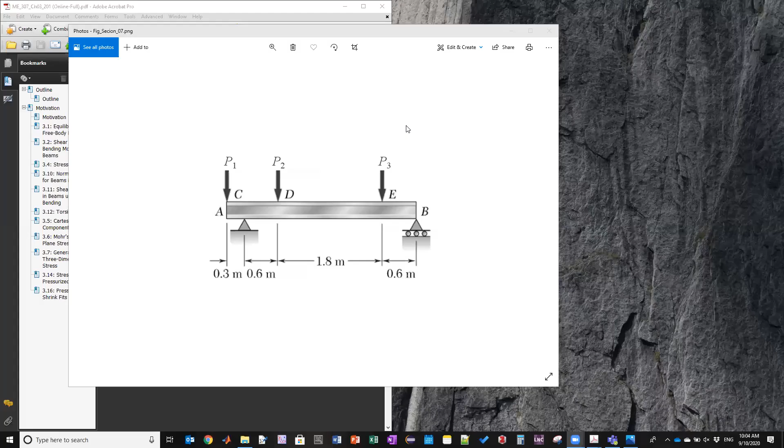Do you see my screen again? Do you see the figure, ya shabab? Yes, this is the figure for the quiz, correct? Yes, okay. All what you need to do, this is Windows. I open the figure, and then I can just go to edit. There is a very short menu here for the most needed things that you usually use, like resize.

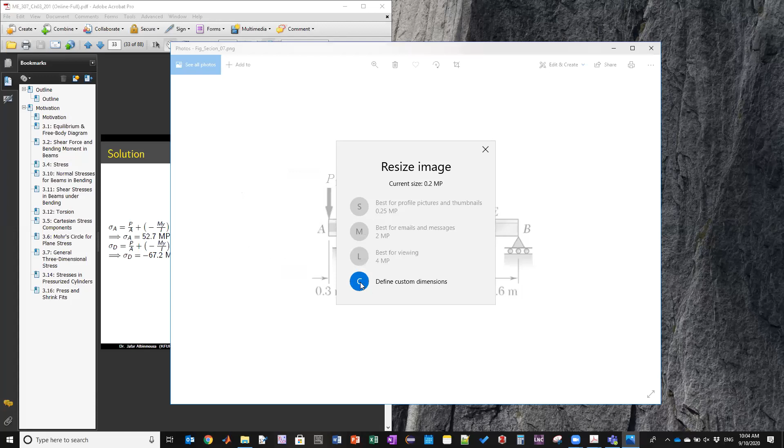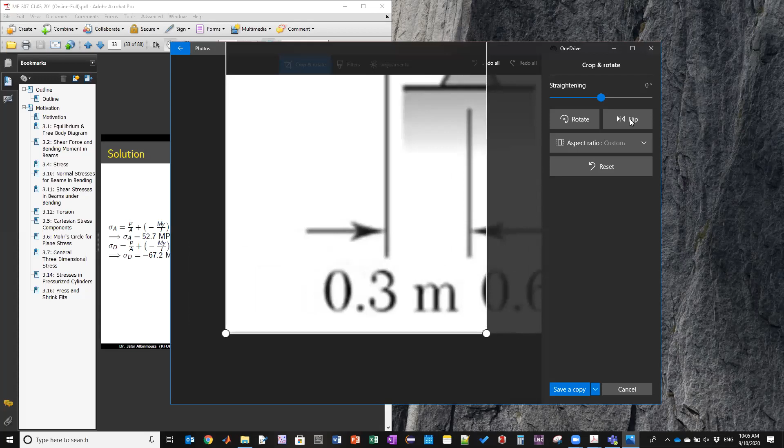When you resize, you can put any definition you want. Play with it a little bit and you will reach the size that is needed. You can crop the image, make it smaller or bigger, whatever. Maybe cut it this way where it shows your face. You can do whatever you want with a simple click. Is that enough? Yes, thank you, Doctor.

I will have to, inshallah, but not today. We are late, we need to move on with the bending section and finish it up. But inshallah, maybe next class, just as a mercy for the grader, I am going to share with you my phone screen live, and show you how I can scan maybe 100 pages in one file, which looks like a scanner. I know some of you did that, but there are too many who didn't, so hopefully I'm going to teach you how to do that next class.

Tamam, all right. Now let's move on to our problem. What are we going to do? We had a discussion on this. I think what I would like you to remember is the following: this vise, which looks like this, or a clamp, is going to have uniform tension because of P as a force.

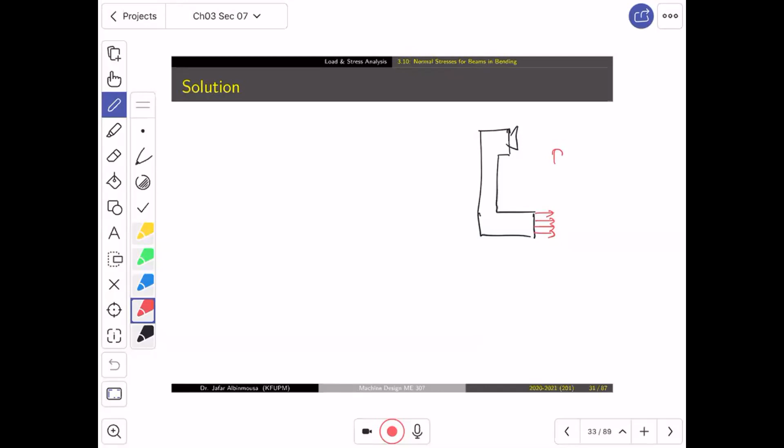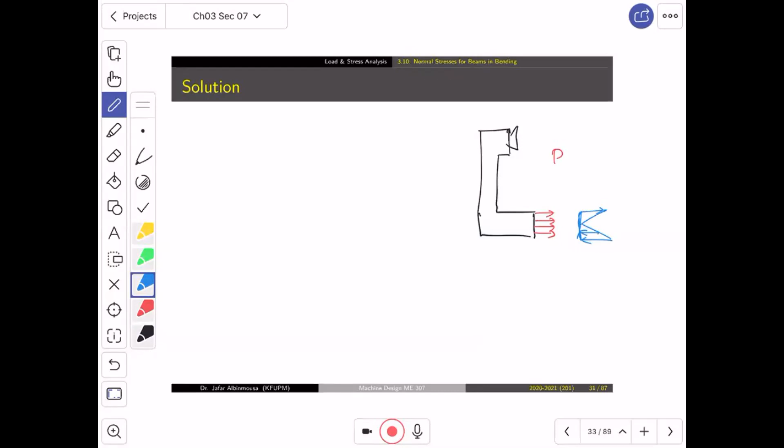And it will have bending, which is distributed this way: compression in the bottom and tension in the top. So this is tension, this is compression, this is tension. Now what we need to do is find out the geometrical property. In tension, when we say sigma equals F over A, we will need area and we will need force.

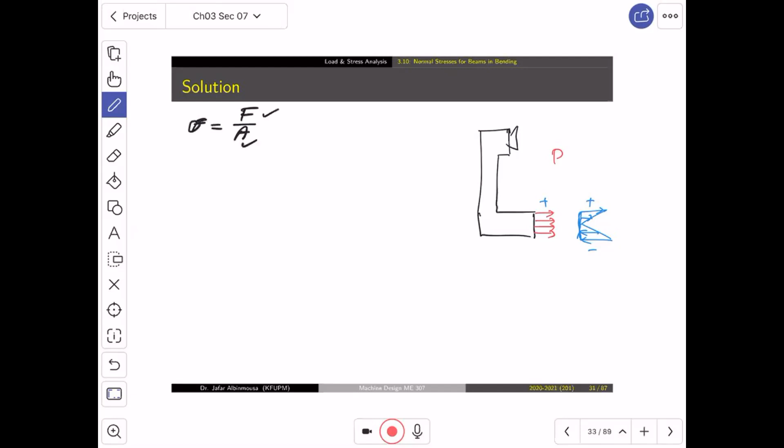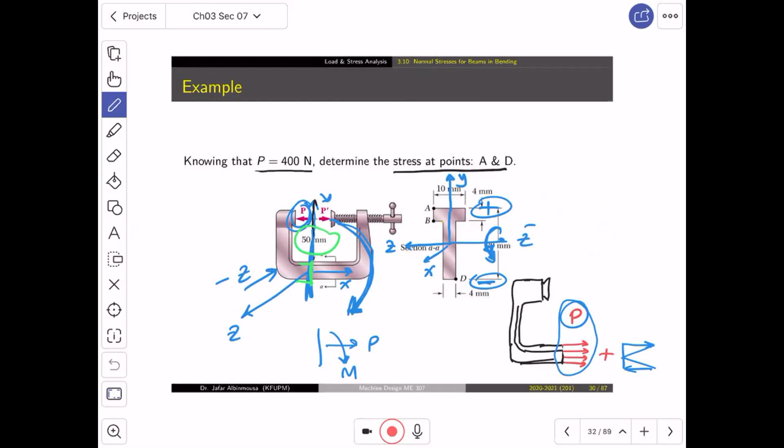How did we know the upper part will be tension and the lower part will be compression? Well, that's a hell of a discussion, yeah Abdullah. We did this when we argued that the beam is like this, this is X and this is Z, and these two forces are going to make bending in this direction.

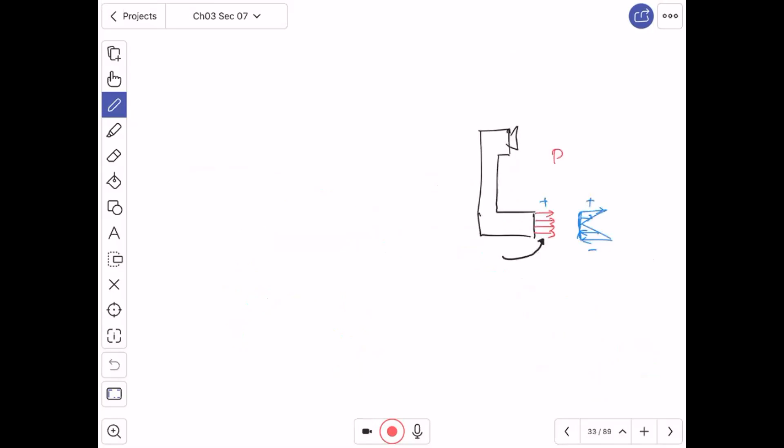So if it's going to make bending in this direction, this part will be bent like this, which will make the top part tension and the bottom part compression. So now the bending will be MC over I. So we need I, we need A as a geometrical property.

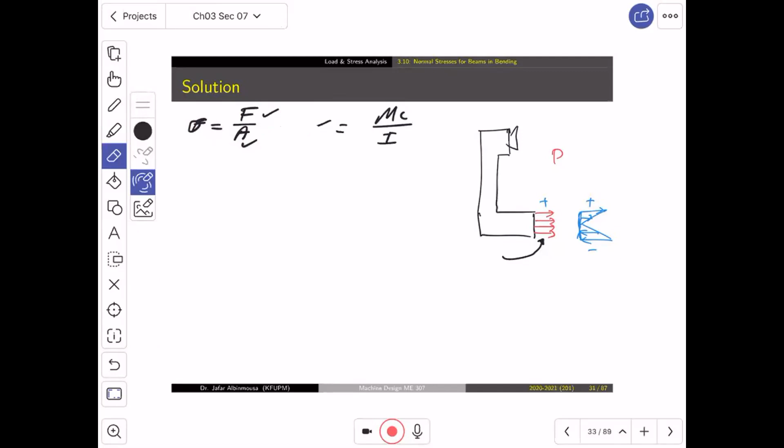Usually we start by geometry. So let me quickly clean up and draw the geometry for us so we can know it. We are having this, and this, okay? This is point D, this is point B, and this is point A.

Now, this one is how much? 10 millimeter. This one is 4 millimeter. And the distance from here to there is 20 millimeter. Now, you probably forgot that this one is 4. Let's see how far you can remember.

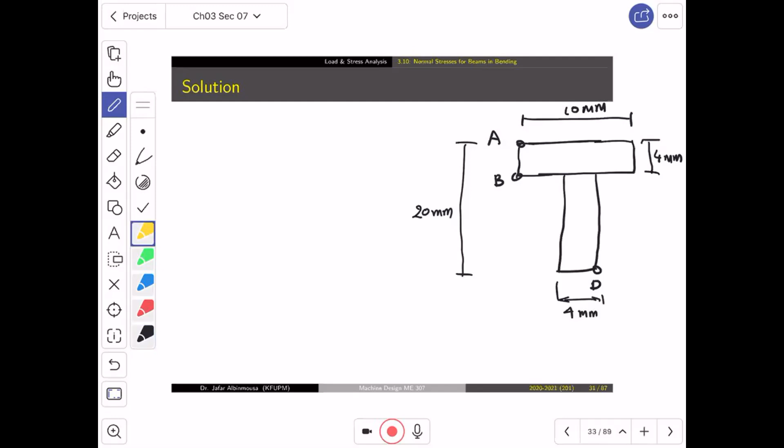Now, what are we going to do? I intentionally split this part into two, okay? The first one is this, the second one is this one. So what I'm gonna do is draw this table as we used before.

This is part, and then I will have the area in millimeters square, and then I will have y0 bar in millimeter, and then I will have the multiplication of A multiplied by y0 bar, which is going to be millimeter cube. Do you see that?

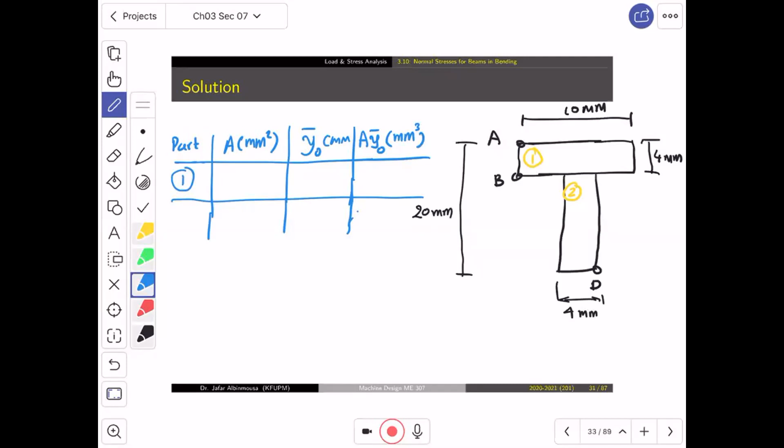Now, for part number 1, look what will happen. We have 10 by 4, which is how much the area, Shabab? 40. Okay, so this is 40. Now, the question is, what is y bar?

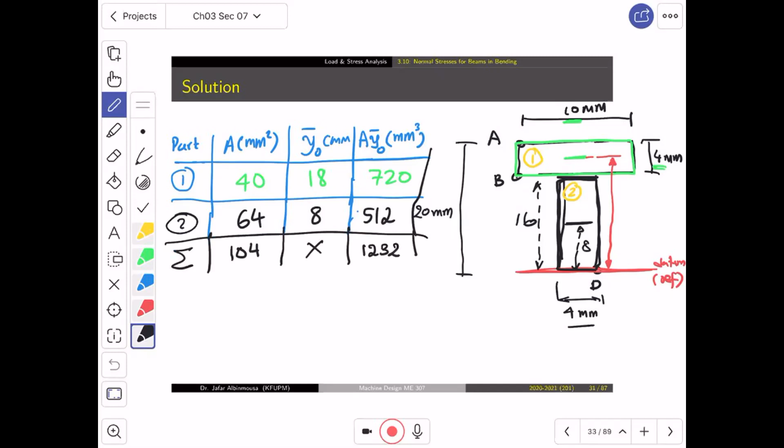Now, what should I do? I close this, and then I have another row of the sum. I sum both of the areas, which is 104. This one, I don't need to do anything with it. And I sum the multiplication, which is 1,232. So the real centroid, which we will call capital Y0, is the sum of AY0 divided by the sum of the area, which is 1,232 divided by 104. How much is this?

This is 11.846. Now, where is this located? It is located from the datum, going to 11. If this is 8 and this is 16, then 11 is probably somewhere here. So this one is 11.846.

Does this make sense? Anybody would think that this makes sense? Yes. Why? It should be between the two bars. Why does it make sense? Because it should be between the two areas, not below one of them. If you have only this area, the centroid from the reference is going to be 8. You put more material, the centroid will shift up a little bit, depending on the size of this area.

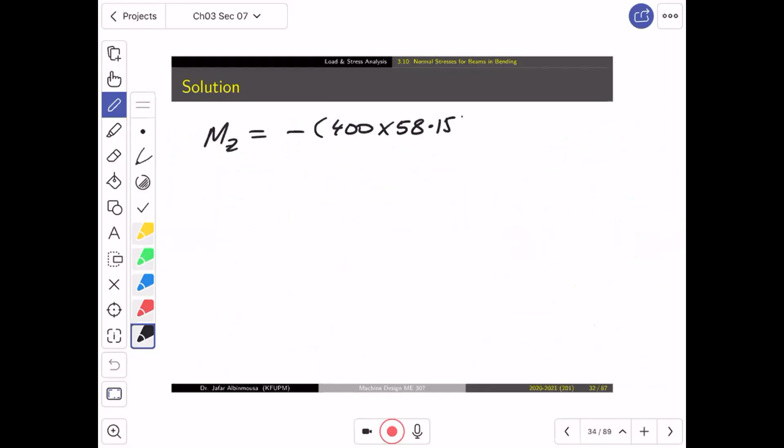Okay, now we move on. Now if we move on, we will have MZ, which we agreed is negative, which is equal to minus 400 multiplied by 58.15, which is going to give you, if you divide this by 1000 because it's in millimeters, minus 23.26 Newton meters, okay?

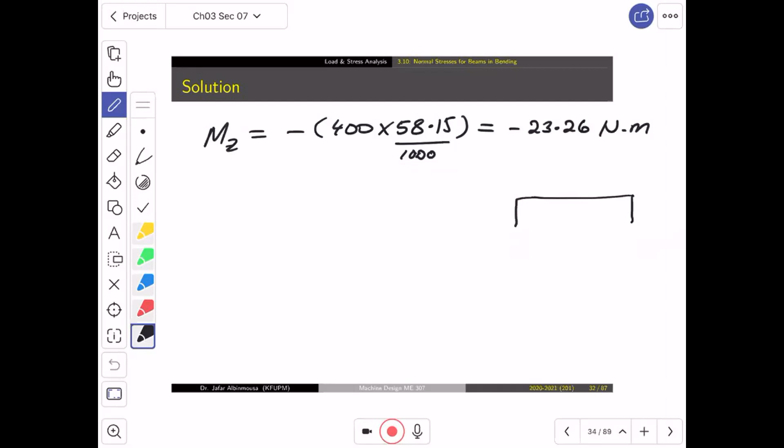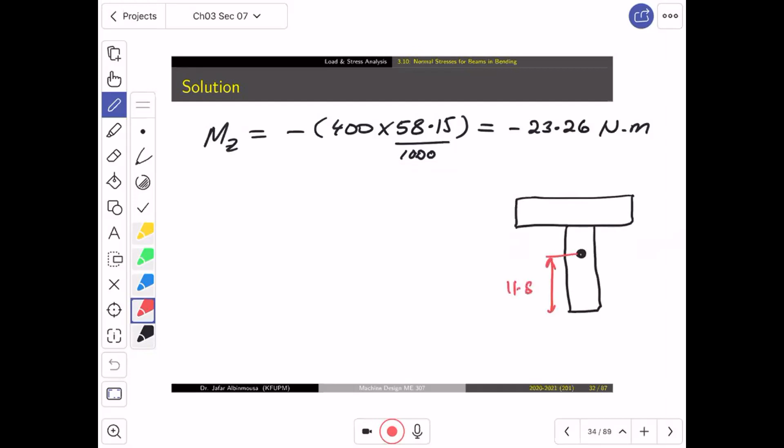We're not done yet, guys. We're not done yet. The cross section is here, like this. The centroid is located here. The centroid is at a distance 11.84. We know that this dimension is 16, this is 4, this is 4, this is 10. Now we need to find the moment of inertia about the centroid.

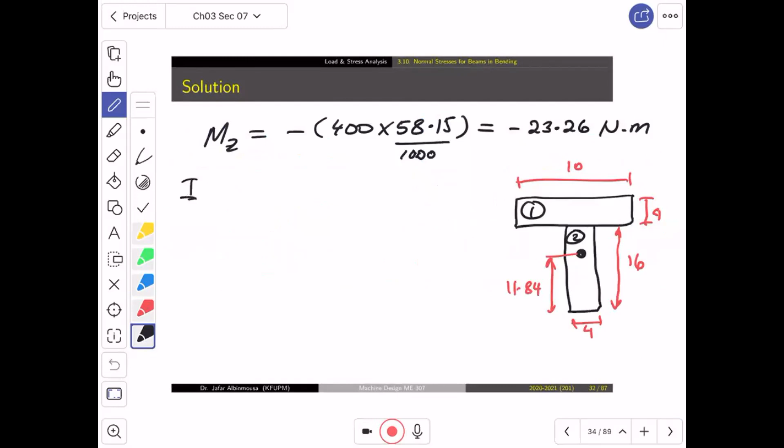If I1 is equal to 1/12, is that right?

This is the centroid, this is the neutral axis, so this is the base. So if you said 1/12 B1 H1 cubed, which is equal to 1/12. What is B1, guys? 40. Is that true? 40.

Sorry, B1 is 10. Is that true? Yes, it's parallel. Okay. So it is 10 multiplied by how much? 4 cubed. Okay, what is I2?

1/12, 4, multiplied by 16 cubed.

Good, guys. Yes, but it's not about the neutral axis. You need to understand and remember that this equation, when you apply it, you are applying it about the neutral axis, about the centroid of each geometry.

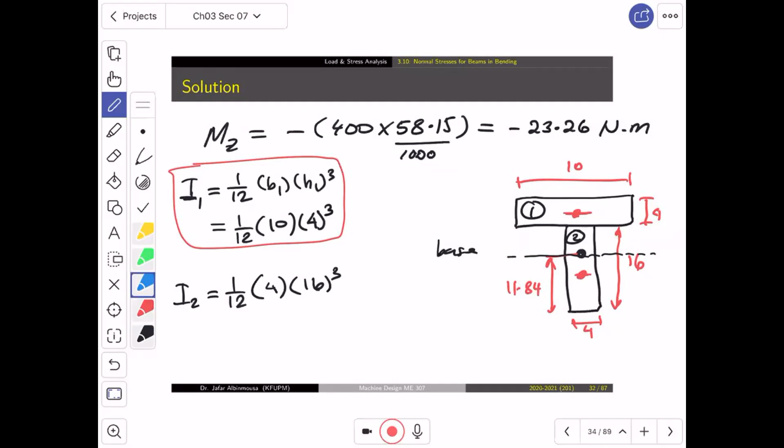But we want the moment of inertia about what? About this. So how do you do that? Parallel axis theorem. Okay, so you do the parallel axis theorem.

So the parallel axis theorem tells you that when you have I1 about... let me make it general. When you have I about point O, which is any point, you have to find I about G, the centroid, plus you add a term which is what?

A D squared. So what is A? A is the area of the geometry. So for example here, what is the area? What is the area of this? It's 40. 40. What is the distance?

It's the distance from the centroid to the neutral axis. So that distance is equal to

6.154, and then square it. Now, for the other geometry, we have an area which is 64, and a distance, I'm going to make it green, which is from here to there, which is equal to

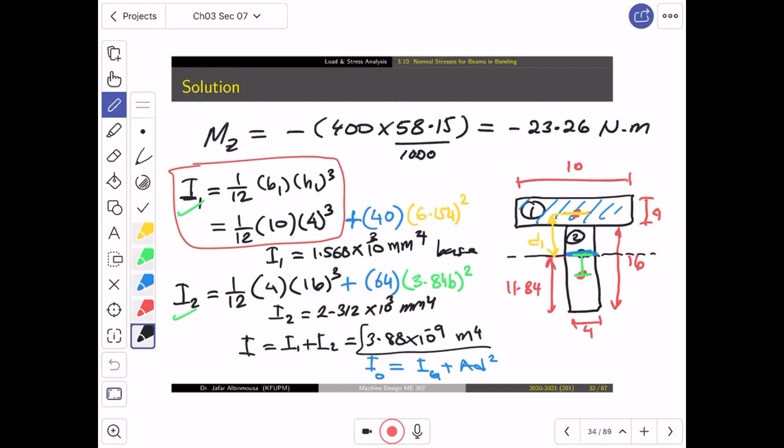I2 is equal to 2.312 multiplied by 10 to the power 3 millimeter to the power 4. Now I know this, I'm almost done. The last step for me is to find the stress.

If you recall again, this is the cross section, okay, and this is the neutral axis. Point A is here, point D is there. Now also, I know that the upper part will be under tension. This is tension, this is all compression.

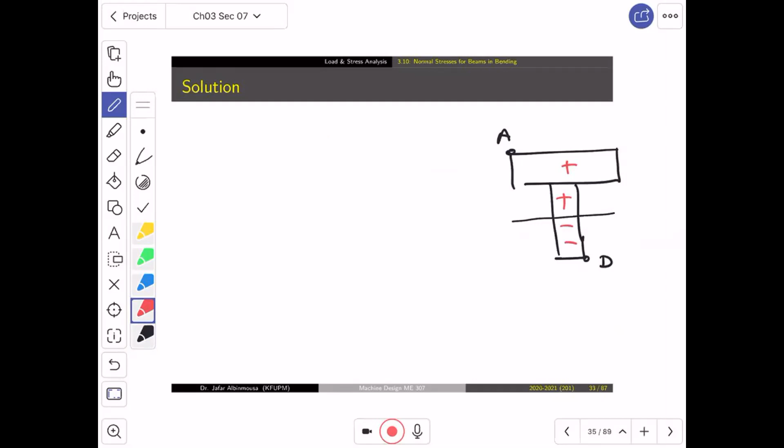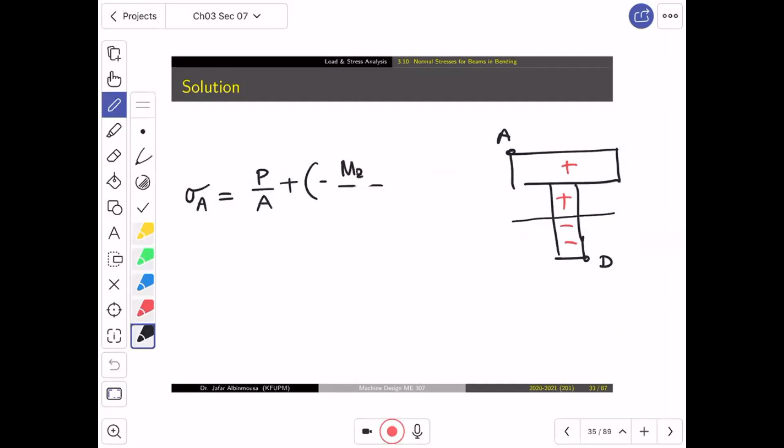So if I want to find sigma A, it is equal to P over A, which is tension, plus or minus My divided by I. Now what will happen - let's write the equation in a complete way. This is Mzy divided by Iz.

So this is going to be equal to 400 as a force divided by the area, which is 104. This area we found from the table in the beginning. Plus, there is a minus sign, and then minus 23.26, the moment, multiplied by the distance.

The distance from here all the way to the top. Now this distance is 8.15, and then multiply by 10 to the power minus 3. And then I divide by 3.88 multiplied by 10 to the power minus 9.

And how much is this? This is going to be 52.7 megapascal.

Now, with respect to sigma D, I will again have P over A, which I know, plus or minus Mzy divided by Iz, which is going to be equal to this part here, plus or minus, and then I have minus 23.26 multiplied by what? Minus 11.846 multiplied by 10 to the power minus 3.

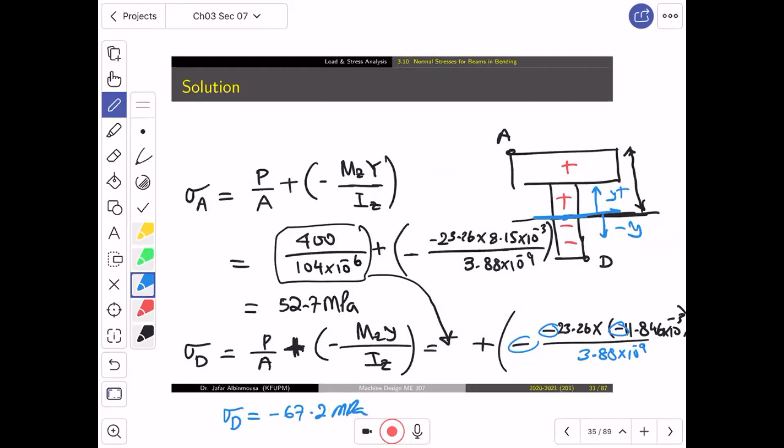You mean this one? You mean this one? This equation? Yeah, this equation, and we use the load to find - this equation covers two moments, one about Z, one about Y, both of them creating normal stresses in the X direction.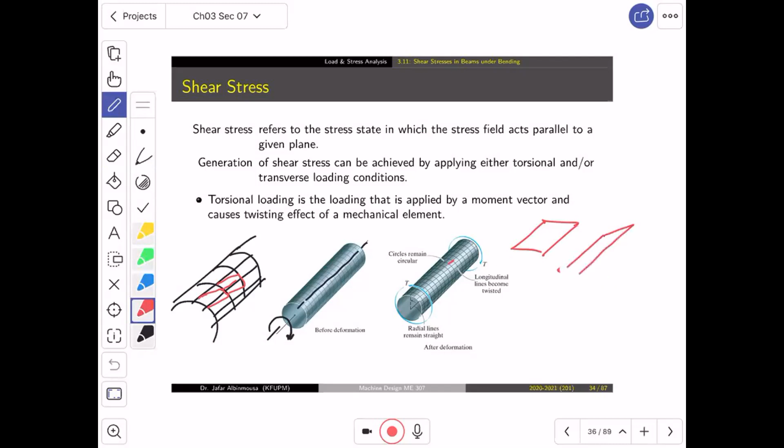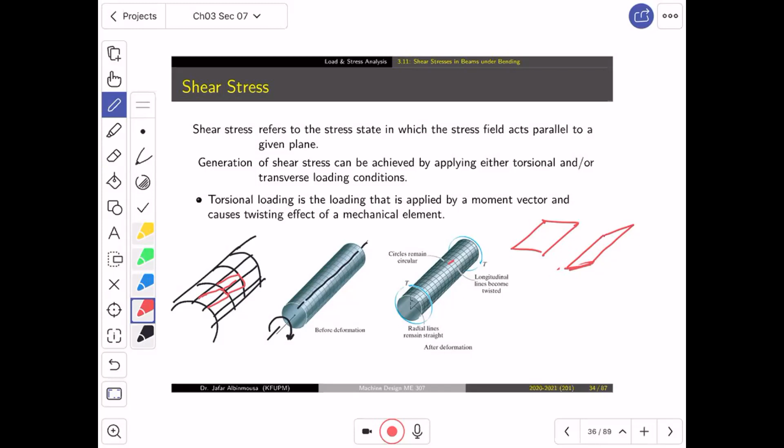So torsion is very important, similar to bending. Inshallah, in chapter 7, when we talk about shafts, which are huge mechanical elements of rotary equipment, we will see that mostly we will focus on bending and torsion. Hopefully later we will explain why.

This is just an illustration of how torsion is applied as a rotation. This is a figure showing the right hand rule with the thumb pointing upward, which is considered a positive direction. The other direction will be considered negative.

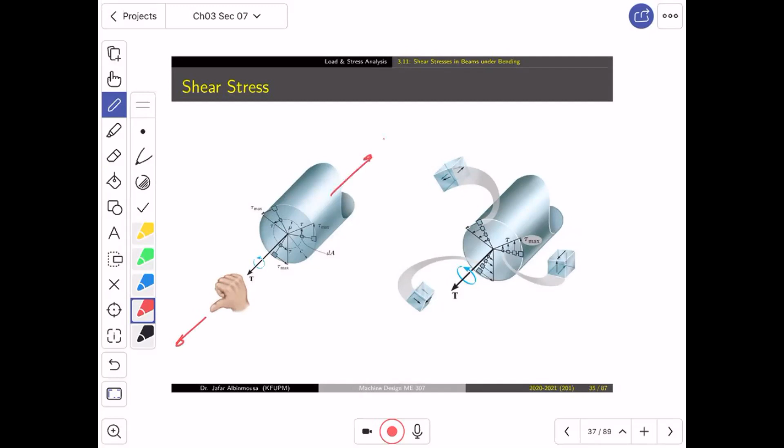What is interesting about torsion is that if it is applied within the elastic regime, it will generate maximum shear stress in the surface, furthest from the center, and have a zero value in the center of the cross-section. The distribution is linear as far as the material is elastic. If the material is not elastic, this distribution will become non-linear. Non-linear deformation is interesting, but we are not going to talk about it. It's too much.

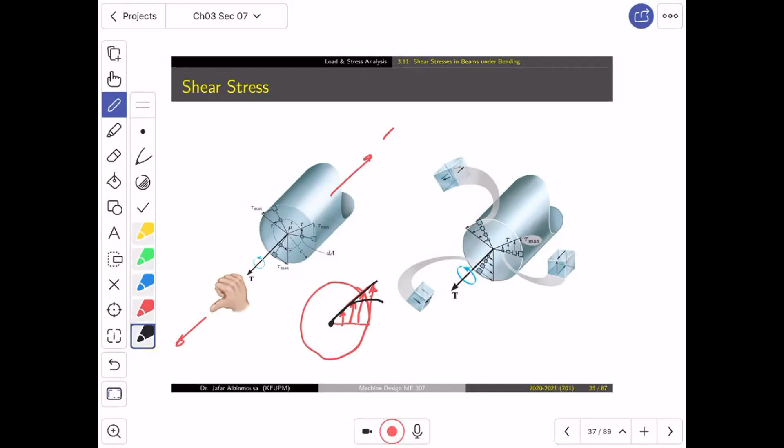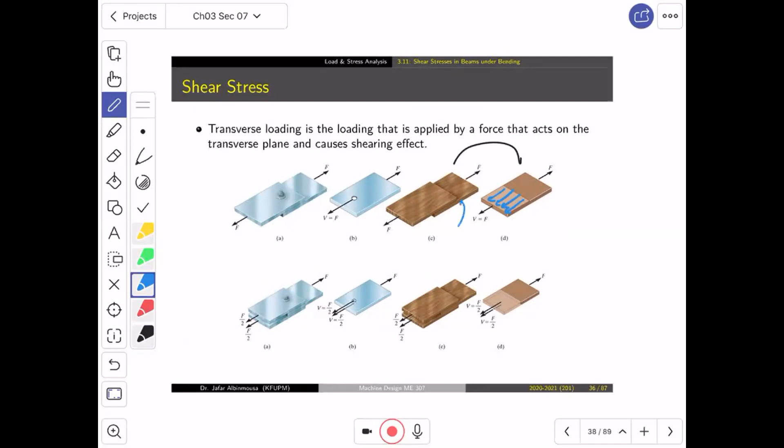What is the other way to generate shear stresses? It's through transverse load, which acts parallel to the surface but in opposite direction, trying to shear off the material. If you look at this example, the shear stress will be acting on the surface like this on the bottom face, and the upper face will have an opposite sense. That's how you shear things off.

Now, what we are going to do in the next class is discuss how to calculate the shear stress resulting from bending. Somebody might ask, what does this have to do with it? I'm pretty sure you will be confused, wondering why we're talking about bending.

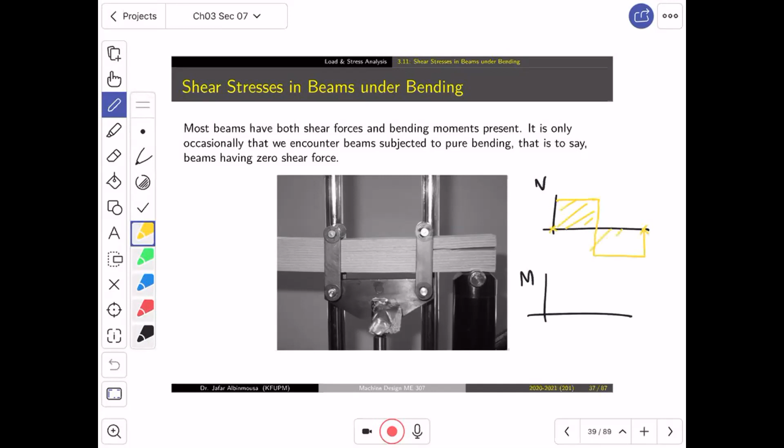But let me tell you why, the answer is very simple. If you remember from the quiz, when we draw the shear force diagram and the bending moment diagram, let's assume we have a shear force like this, and then like this, and then like this - a very simple diagram. Now we agreed that the bending moment is the area, so I will have a bending moment like this and like this.

Now that's the question: what is this length? This is X, representing the length of the beam. In reality, this could be an I-beam sitting on two supports with a perpendicular force acting on it, with a cross-section similar to the one we had before. The idea is simple: if I ask you to find the bending stress at this location, you will use the equation sigma equals M C over I. You will find I just like we did before, go and find the centroid here, and this is C, no doubt about it.

What is the value of M? Is this one - that's where I want you to find it. Maybe I will ask you to find it right here, so you will use this moment. It doesn't matter, what matters is this value. What does that mean? What is this value, guys? Maximum bending moment. This one.

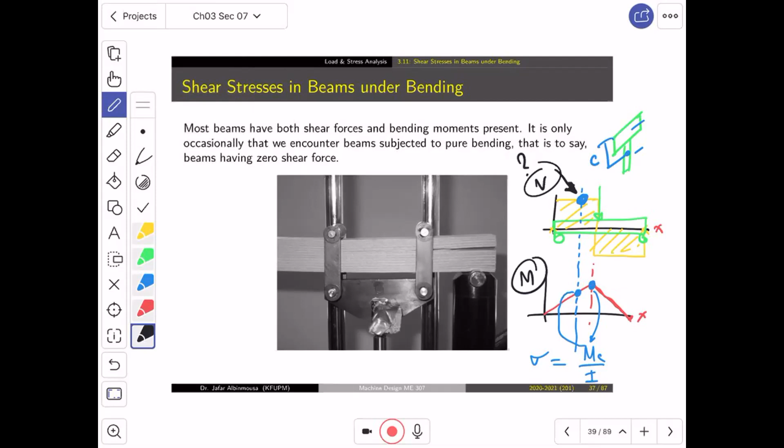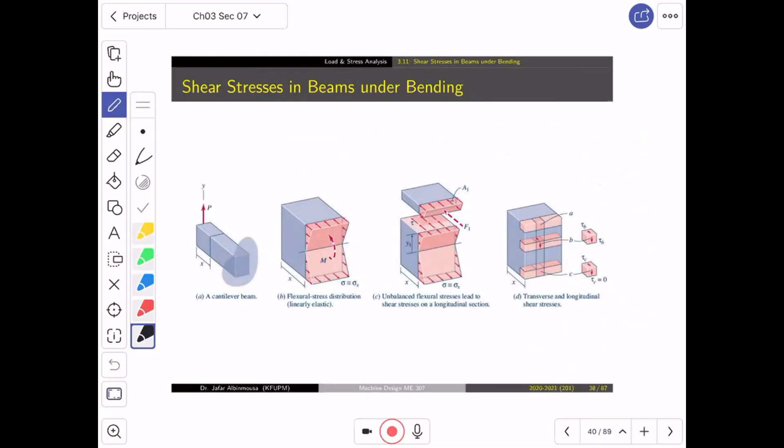If there is a shear force diagram, you will ask yourself how this is going to act on the subject. So next class, inshallah, we are going to show you how to deal with the shear force that comes automatically when we have bending. Okay, thank you so much, have a nice weekend.